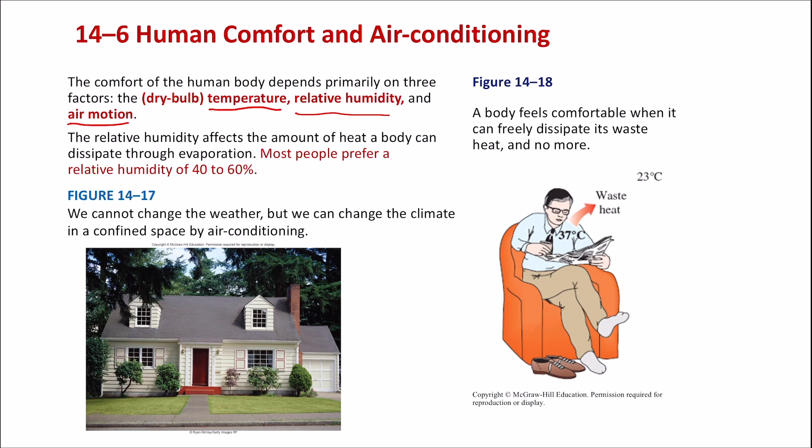So let's take a look at the major air conditioning processes. There's just simple heating, simple cooling, which is pretty much literal. You can understand. You just add heat or just cool it down. Or you can just add moisture, humidifying, or remove moisture, dehumidifying. So there are four basic processes, and of course you can imagine you can combine them together.

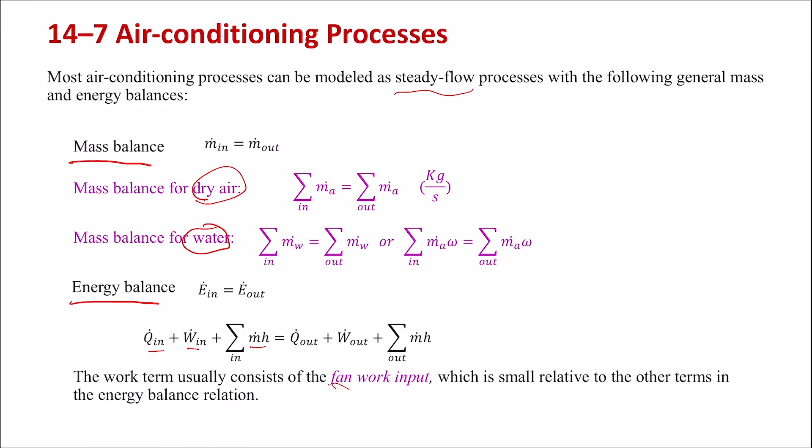So with this, we can start to analyze some typical problems. And today we're going to look at about 6 examples. So let's go through them one by one. The first one is just simple heating or cooling. Notice here omega is constant during simple heating and cooling, and on the psychrometric chart it is just a flat line. So please keep that in mind. Make sure you know how to draw these process lines as well.

So in simple cooling, the moisture content doesn't change, humidity ratio doesn't change, and you can write out the energy balance. There's no work, only heat transfer, and that equals the enthalpy change across this, whether it's losing heat or gaining heat.

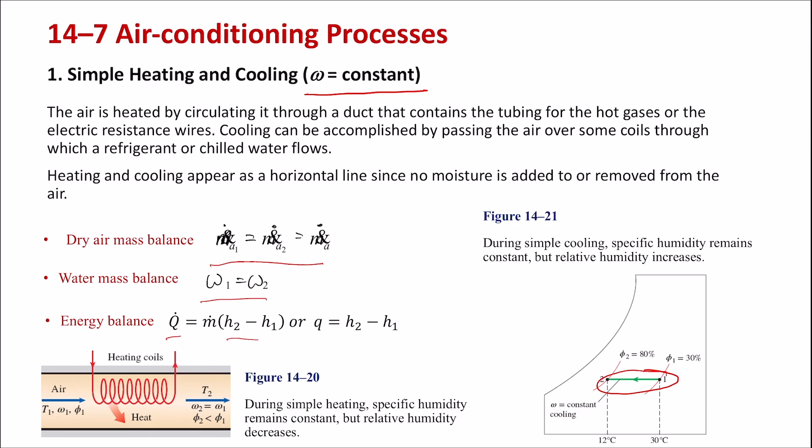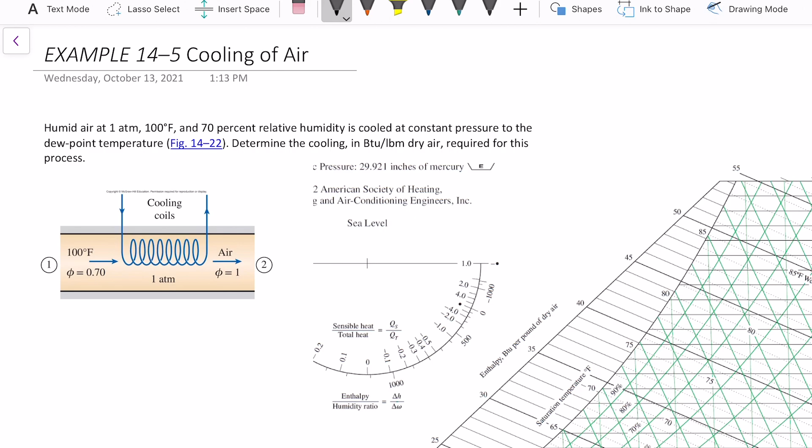So let's take a look at this example. The problem gives you the inlet air, and it says it's cooled at constant pressure to dew point temperature, and determine how much heat it lost through this process. Now if you want to find Q, it will equal H2 minus H1 in this case. We're given the inlet state, so we can determine H1 from the chart or from calculation. Then we just need to find H2. We're told that the final temperature is at dew point temperature.

So how are we going to find the dew point temperature? Remember, this process is just a simple cooling process, so omega stayed the same. So on your chart, you will draw a flat line to find the dew point temperature. And remember, the dew point temperature is that if the temperature is lower than that, water is going to condense. So that's how you get phi equals 1, so the relative humidity is 1. The problem didn't explicitly say the exit humidity is 100%, but from the statement in the problem, you can derive that.

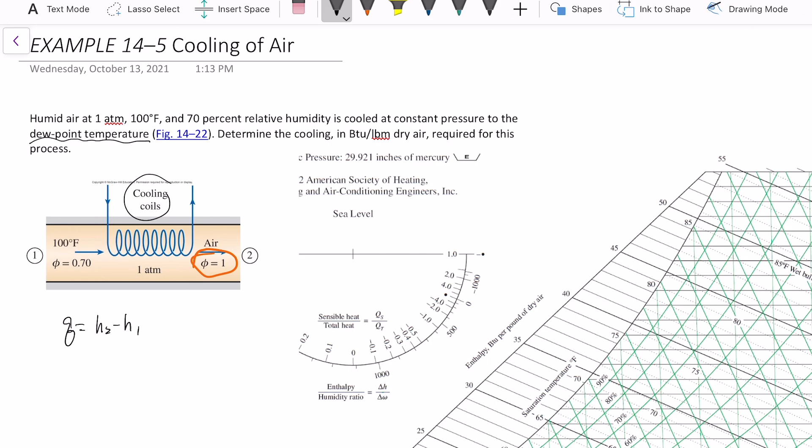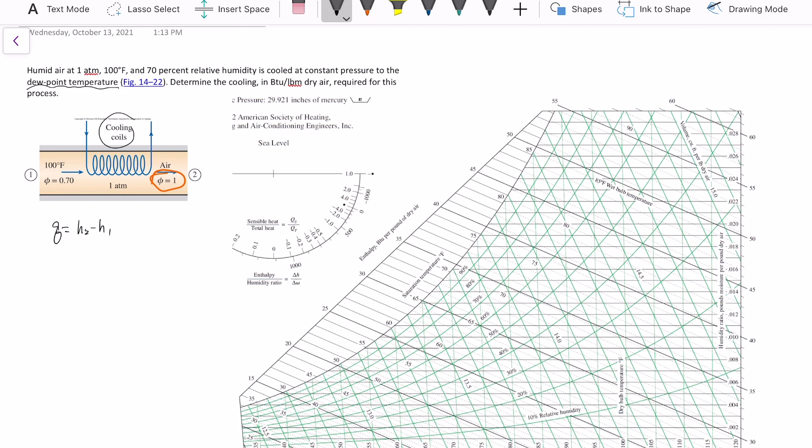So let's take a look at the chart. This is in English units, so make sure you find the proper table in the appendix. State 1 is 100 Fahrenheit and 70% relative humidity. So you're going to draw this line straight up and see where they meet. They almost meet at the top. And then from there you can read H1.

So the H line is here, in BTU per pound. There's 50, 55, and 60 here. So 55, 56, 57. So my state 1, H is between 56 and 57. It's close to 57. So from the chart, we read H1 equals 56.7 BTU per pound mass.

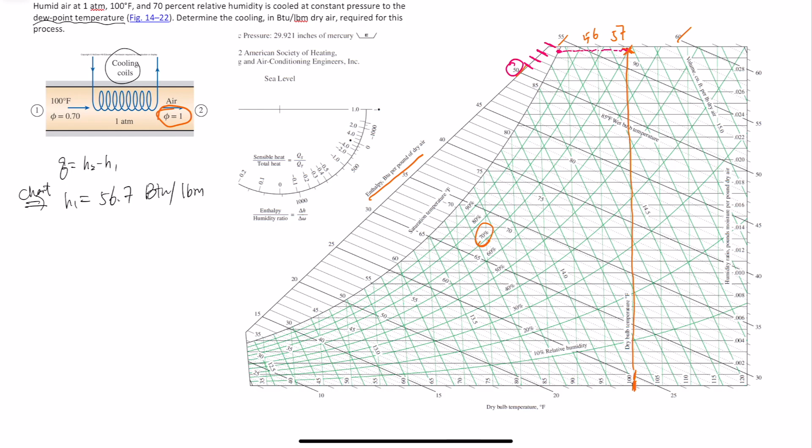And now we need to find H2. Remember we said omega doesn't change, so it will be a flat line. And it reaches the saturation point, or the dew point temperature. We're interested in H, so we can read H directly from there. So again, this is 50, 51, 52, 53, 54. So it's between 53 and 54. Let's just call it H2 equals 53.8.

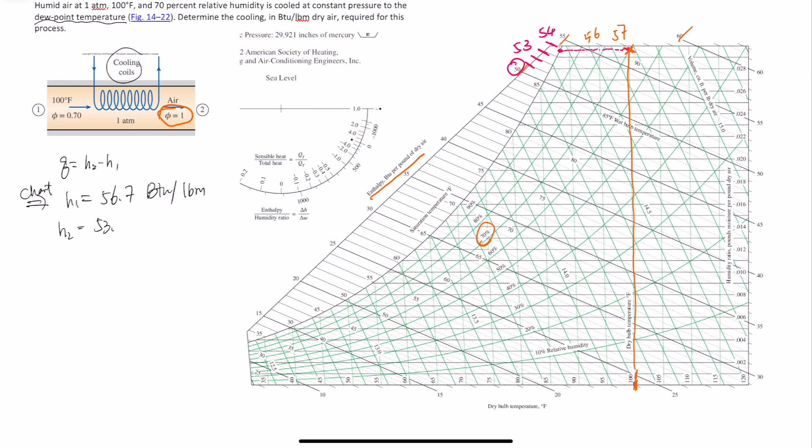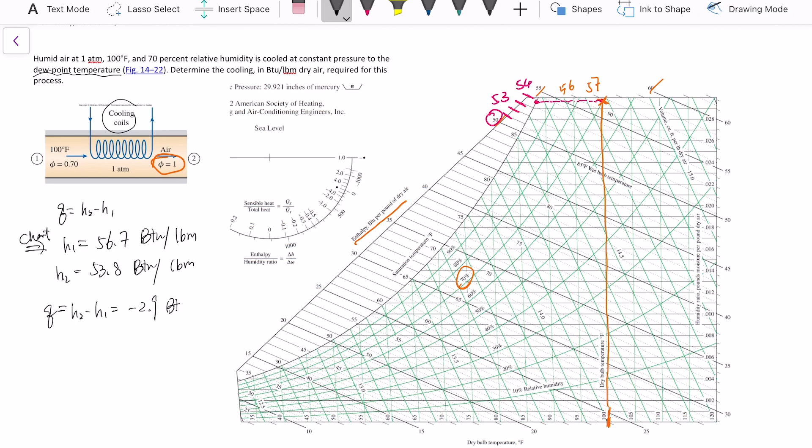And then you can calculate Q. In this case, H2 minus H1 is a negative number. So negative 2.9 BTU per pound mass of dry air. We have to be a little explicit in this case. So here is dry air and dry air. And so this will be Q out.

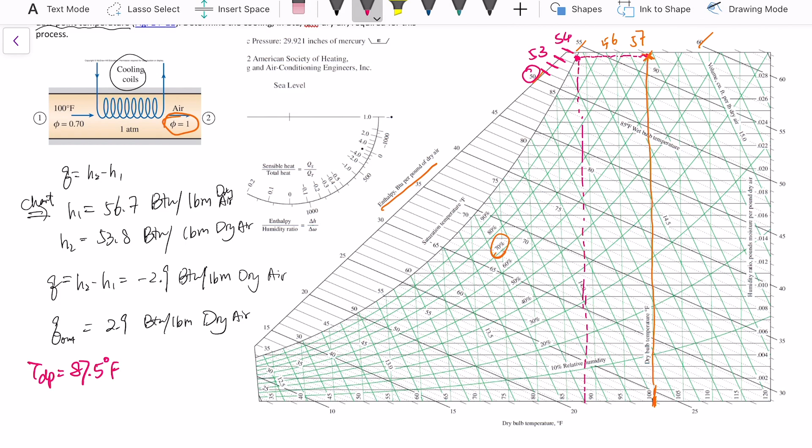So if the question asks you what is the dew point, you got to make sure you know how to find it out. Again, I like to just go from the 100% point directly, go down to read the dry temperature. So let's see that. Looks like it's between 85 and 90. It's closer to 90. Let's call it dew point is about 87. Let's say 87.5 Fahrenheit. So how much did it get cooled? It got cooled from 100 to 87, so about 13 Fahrenheit.

Okay, now let's look at the second scenario where you have heating with humidification. Usually this is done in two steps. You have air first passing through a simple heating coil, and after that the temperature reaches your desired temperature, and then it goes through a humidifier, so you add water or moisture into the air. It's shown on the left bottom corner. As you can see, you have two steps. From 1 to 2, omega doesn't change, it's just simple heating. And then from 2 to 3, you start to add water to it.

So again, from this, you can write out the mass balance. The dry air never changed from 1 to 2 to 3. The dry air remained the same. But for water, from 1 to 2, omega doesn't change. But from 2 to 3, omega actually does change where you add water. So m dot water equals the difference between omega 3 and omega 2. For the energy balance at the heating, you have Q in equals m dot times H2 minus H1, just like what we did earlier.

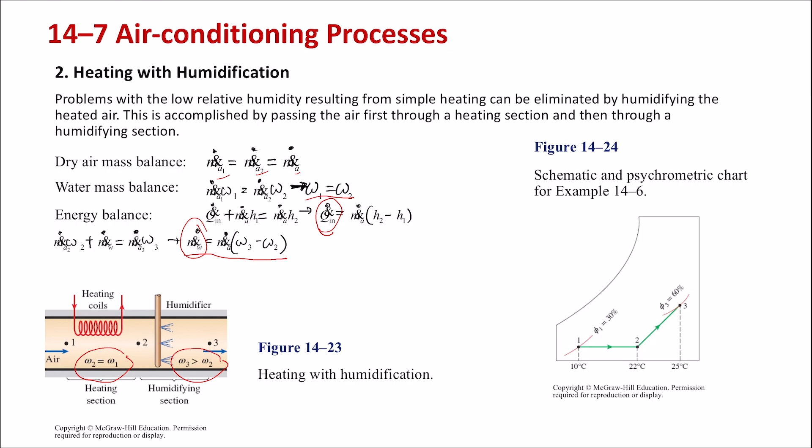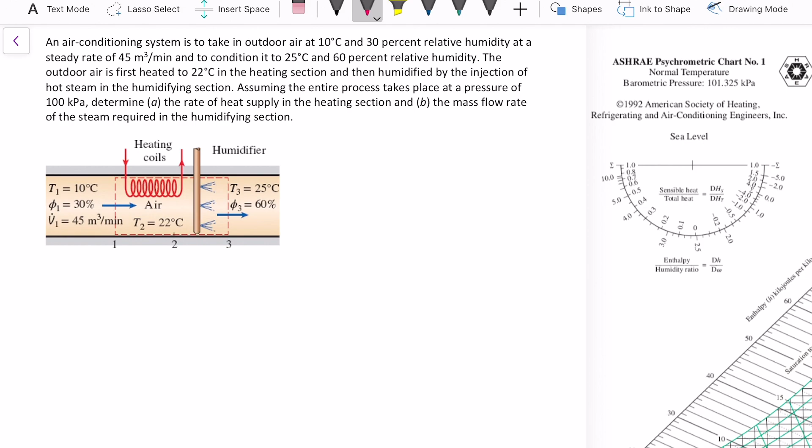So let's take a look at how we do the analysis with some numbers. You're given the inlet property of the air, and you're given the volumetric flow rate. Then you condition it to 25 Celsius and 60% humidity, which is the exit, so T3 and phi 3 are given. And you're told that the air is first heated to 22, so the first step is 22 Celsius. The question asks you for the heat supply in the heating process from 1 to 2 and the mass flow rate of the steam adding, so from 2 to 3.

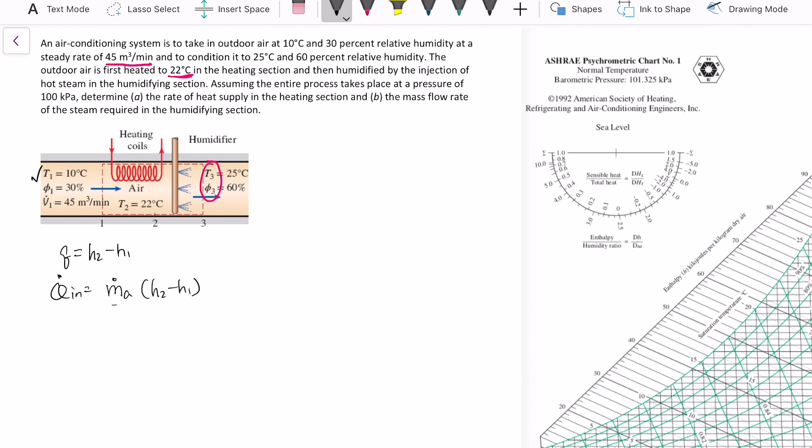So to find the heating, Q equals H2 minus H1, right? And then if you want to find the total Q in, it would be m dot A times H2 minus H1. So we need to find out the mass flow rate of the dry air, and of course find H2 and H1. H1 is pretty much given, and H2 you can find out because from H1 to H2 omega doesn't change. So how do we find out the mass flow rate of the dry air? We are given the volumetric flow rate of the dry air at the inlet, and volumetric flow rate is defined as mass flow rate times specific volume. So from there, we can find out the mass flow rate.

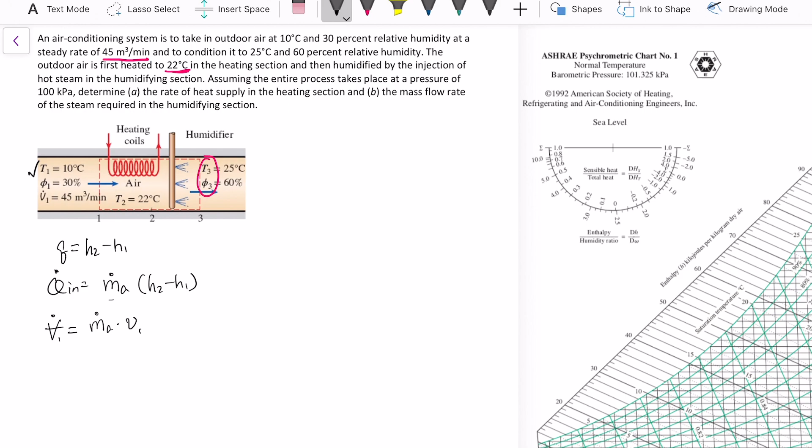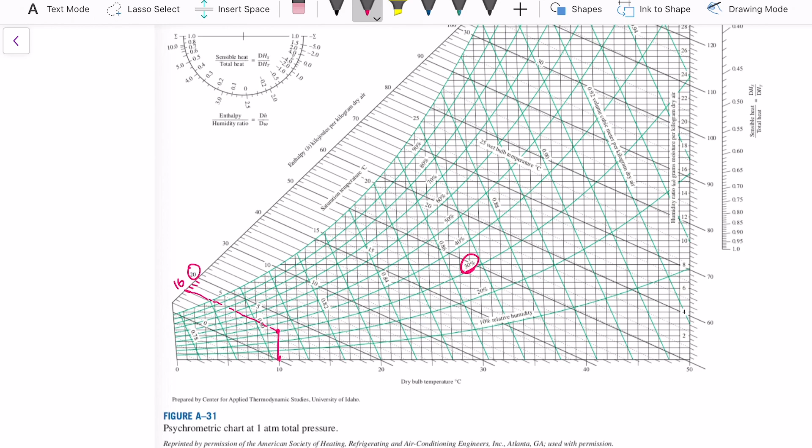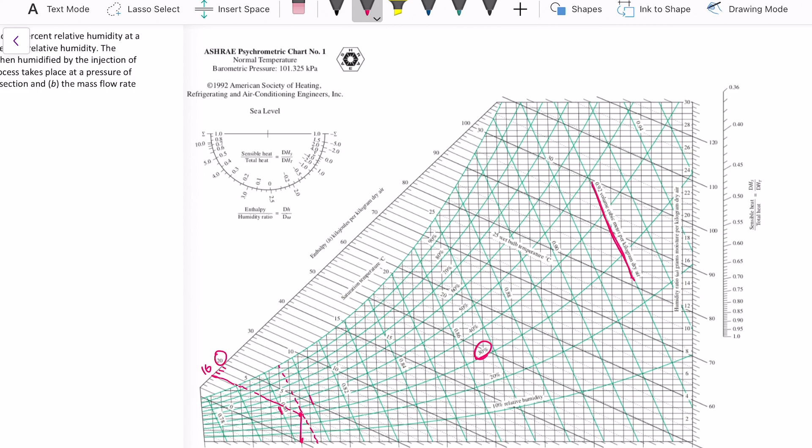So let's go to the chart and collect some numbers. For state 1, we have 10 degrees Celsius and 30% relative humidity. So 10 degrees and 30. It's here, and you can read the H from there. Here's 20, and each grid is 1, so 19, 18, 17, 16. So it is 16. We also need to find V1. Remember, we need V1 to calculate the mass flow rate. V1 is parallel to these green lines. It's about that. This one is 0.8, this one is 0.81, so that point looks like right in the middle. So we call it 0.805.

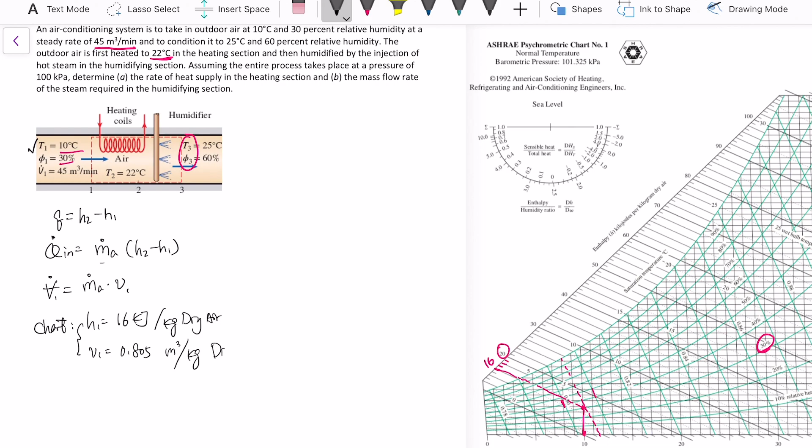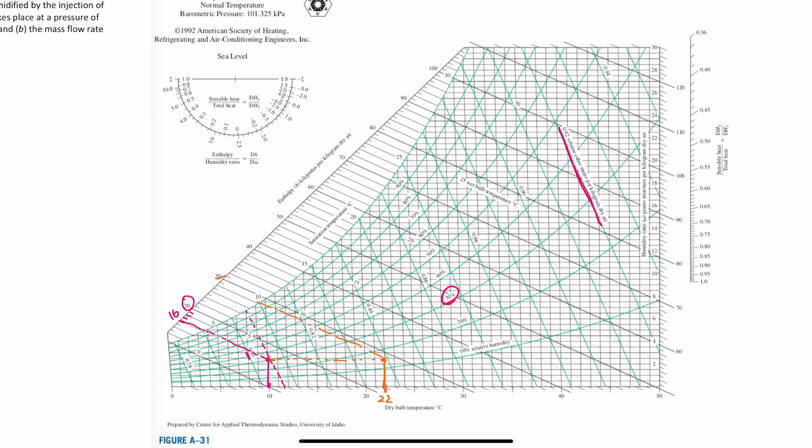So let's write those things down. From the chart, you find H1 equals 16 kilojoule per kilogram of dry air. V1 equals 0.805 meter cube per kilogram dry air. Then we can look up point 2. We said point 2 is 22 Celsius. Omega equals omega 1, which means it is a flat line. So you can draw a flat line from point 1 and cross it with 22. So this is 22. And we need H, so go to read H. It looks like 28. So 30, 29, so about 28. So we find H2 is 28 kilojoule per kilogram dry air.

Now we can calculate m dot A, which is the volumetric flow rate over specific volume V1. So 45 meter cube per minute divided by 0.805 meter cube per kilogram. So you get 55.9 kilogram dry air per minute. Then we can calculate Q in equals m dot times H2 minus H1. Plug in the numbers, I'm going to skip a little bit, and it equals 670.8 kilojoule per minute.

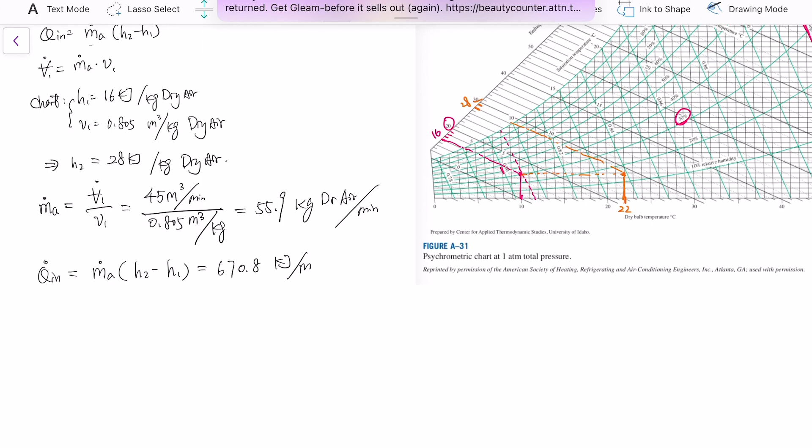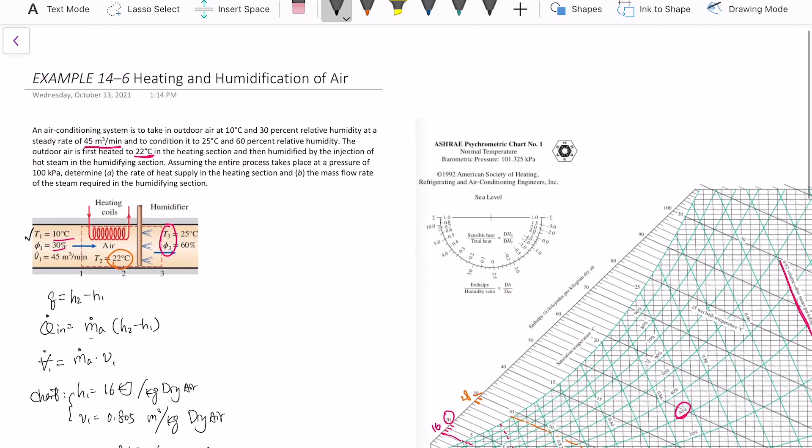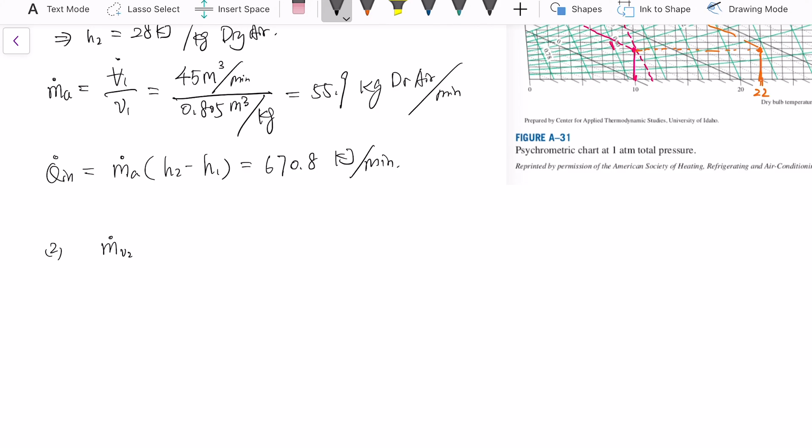You can convert the unit into seconds, but it doesn't say you have to, so you don't have to. And the next part asks you how much water you need to add in during the humidification section. So from the mass balance, we know that m dot V2, the vapor content from 2 to 3, that's the adding water part. So m dot V2 plus the mass of the steam adding in equals the final water content.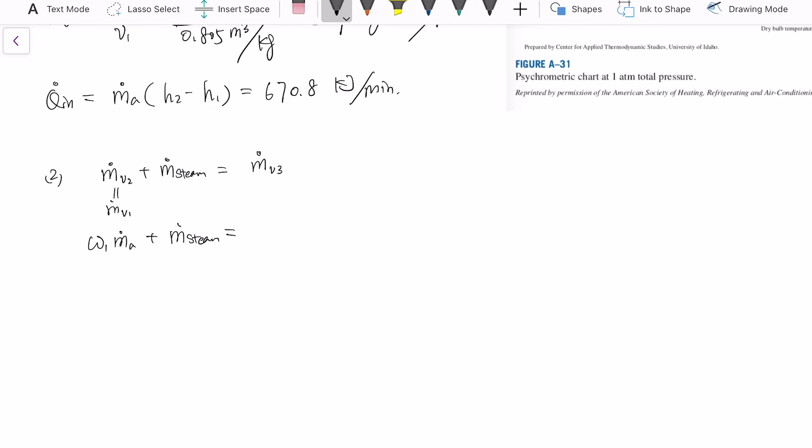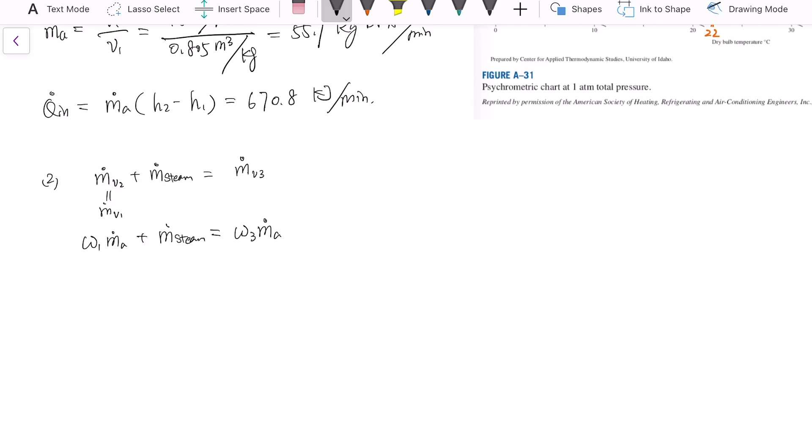And we know that the moisture in state 2 equals state 1. So this equals m dot V1, which you can express as omega 1 times m dot A, plus steam equals omega 3 m dot A. So that means we already found m dot A. We need to find omega 1 and omega 3. Earlier we didn't read omega 1, so let's read that first.

So from here you can draw this line all the way to the right. So let's see, this is 2 and this is 3. This is close to 2.5, so let's just call it 2.5. Earlier we can write one more here. Omega 1 equals, remember this is in gram, but our ratio is actually kilograms, so it's 0.0025 kilogram per kilogram dry air.

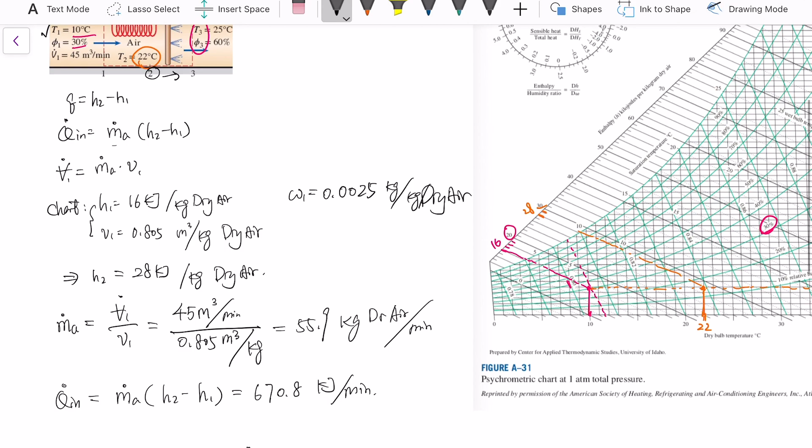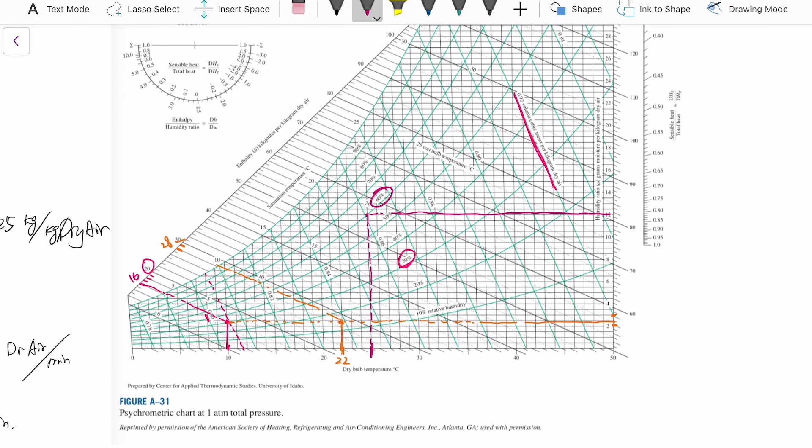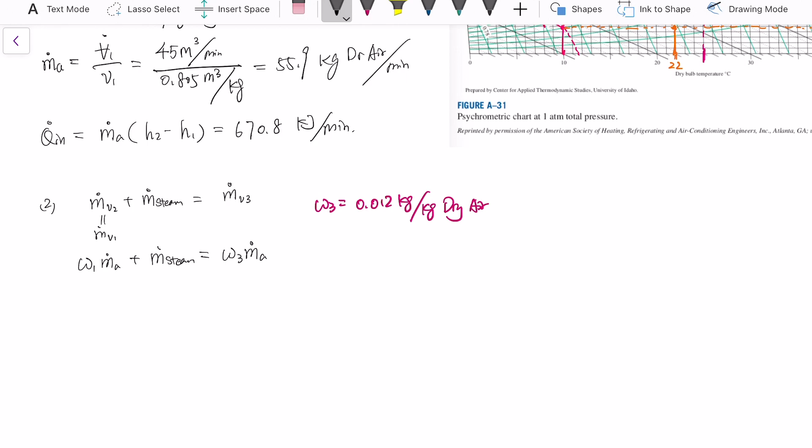And then let's see omega 3. You're given the state 3, temperature is 25 and humidity is 60%. So read the chart one more time. 25, humidity is 60%. And that looks like 12, so 0.012. All right, now we can calculate the steam. M dot steam equals m dot A times omega 3 minus omega 1. We know all the numbers. I'm going to skip the plugging in again. It's 0.53 kilogram per minute.

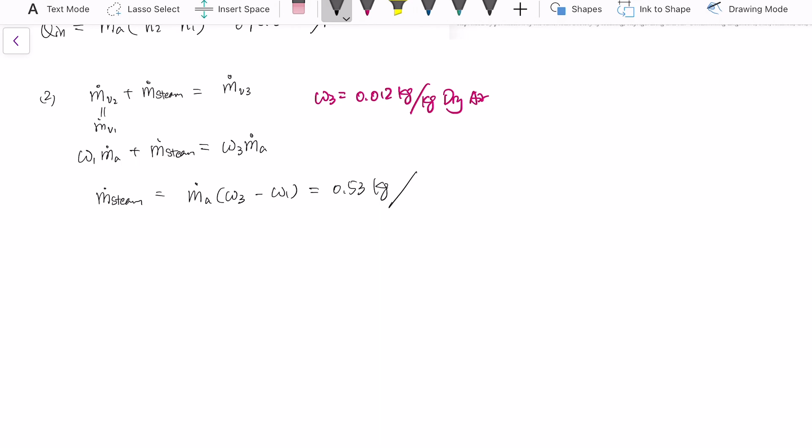Similarly, we can do the cooling with dehumidification. The concept is pretty similar to the previous one, so we're going to go a little bit quicker on this one. So you can see from the psychrometric chart on the right, at the beginning the air starts to cool off. And as it cools off, at one point it becomes saturated. And when it becomes saturated, water is going to come out, and then you start to remove the water out of the air conditioning system, and then the process will remain on this 100% relative humidity line.

So in this process, as illustrated on the chart on the bottom, you have air coming in, and then there will be an outlet for the condensation water to leave the system. Again, dry air mass doesn't change, and water mass in at inlet 1 equals water going out from 2 and from the condensation. So you can calculate the condensation amount of water. Energy balance, we actually have 3 inlet and outlet, and there's also Q leaving this system as well. So energy coming in is m dot 1 times h1, and equals out: we have Q plus all the 2 outlet in this case. So we can calculate how much heat transfer happens during this process.

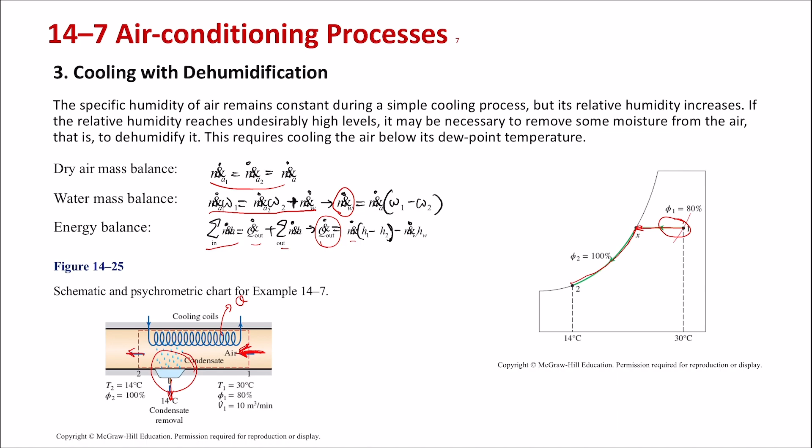So this problem is pretty similar to the previous heating with humidification, so we're going to go really quickly. You're welcome to pause this video and try to solve this problem yourself. The concept is pretty much similar. You're given the condition at state 1, and you're also given the volumetric flow rate at state 1, so you will need to look up the specific volume to calculate mass flow rate. And after it leaves, it becomes saturated. That means during this process, there will be water condensing, and there is an outlet for the condensed water to leave the system.

So the question asks you, what is the heat transfer going out, and how much water got removed? To calculate Q out, you will still do m dot A times h1 minus h2. That's how much the air cooled, and the energy associated with it drops as well. Also in this case, we need to have the water energy removed from the system as well. So you do need to look up to find out the m dot water first before you calculate Q out. And the m dot water from the earlier page, we already know that's just water condensation from it. So m dot water equals m dot A times omega 1, which has a bit more water, minus omega 2, which has less water.

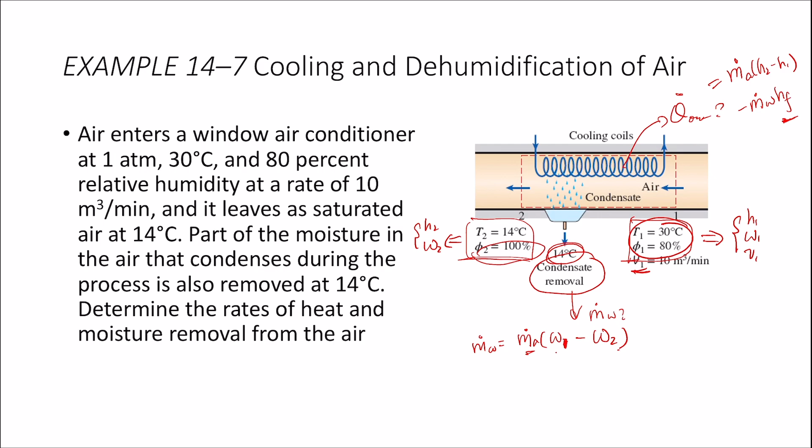You just need to find out HF in that sense. And so you go to the water table to find out water leaving. So you're told water leaving at 14 degrees Celsius. So you can find HF at 14 degrees Celsius to approximate the enthalpy of the water leaving the system.

So first state, 30 degrees Celsius and 80% humidity. It's about this point. And then you go ahead and read the H on the top and omega on the right. So H is about, so this is 80, 81, 1, 2, 3, 4, 5. So between 85 and 86, we can call it 85.5 if you want. And omega on the right hand side, so this is 20, this is 21, so this is over

21.5, so we can say it's 21.6, and then we can read the volume, which is parallel to that line, so 0.88, so this line would be 0.89. My specific volume would be between those two numbers. We can call it 0.888 or 89. So let's write them out. Omega 1 equals 0.0216. And V1 equals 0.889. H1 is 85.5.

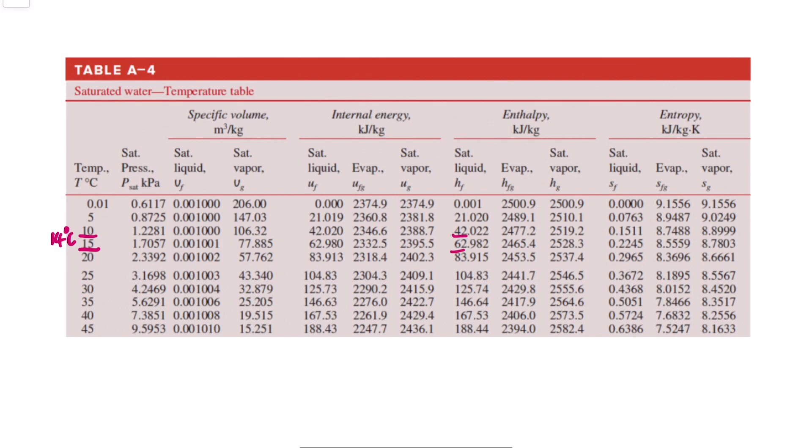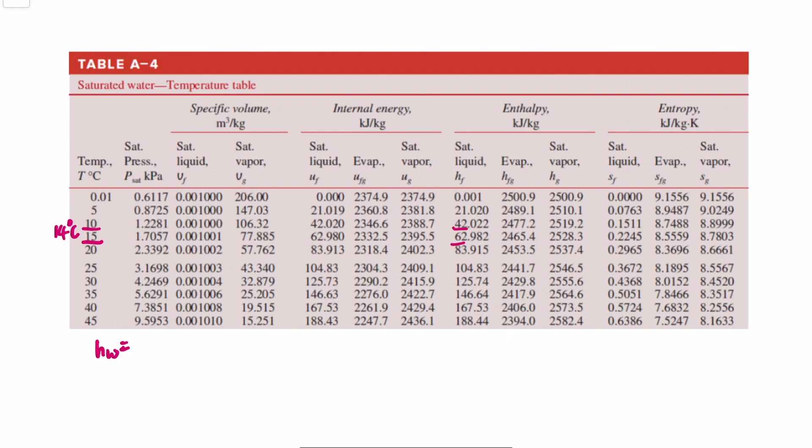So we need to look up in the water table. So the water table here, you have 15 and 10. Our temperature is 14 degrees Celsius. So my H is between 42 and 62. You got to do a little interpolation and you will find out H of water equals 58.8. Then you can plug back into this Q equation and calculate the number. So I would encourage you to go ahead and try it out yourself.

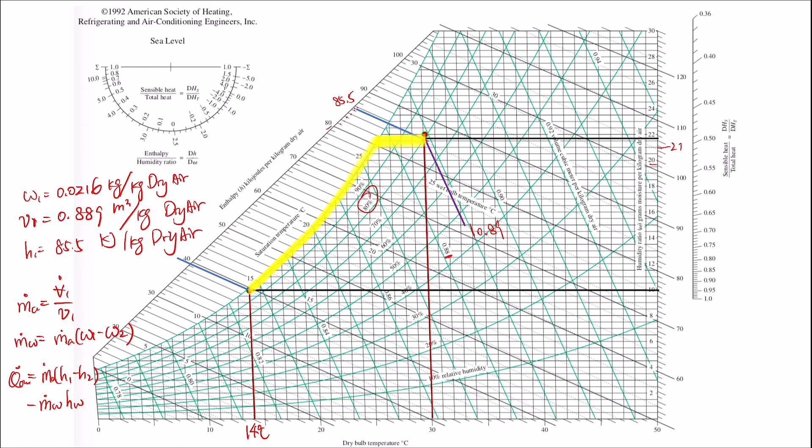One thing I do want to point out is this process would go through a cooling. So the humidity, the specific humidity doesn't change at the beginning. So it would just be a flat line to the left. It starts to cool. But once it hits the saturation line, the water is going to leave from the air and it starts to condensate. And then the air will remain as a saturated air. So it will follow the saturation line like that. So that's the process line.

The next example is called evaporative cooling. Basically what happens is you probably had this experience where you feel really hot and you put some wet towel on your head. So the wet towel is going to evaporate water into the air, and then you can feel immediately cooling on your head. Or another scenario is if you ever wear clothes and jump into the water, or you just happen to get caught in the rain, you will feel very cold because the water of the wet clothes will start to draw heat from your body. And especially when there's air passing through you, that's when the air is going to draw more water to evaporate, and it's going to draw more heat from you. So that's pretty much the evaporative cooling.

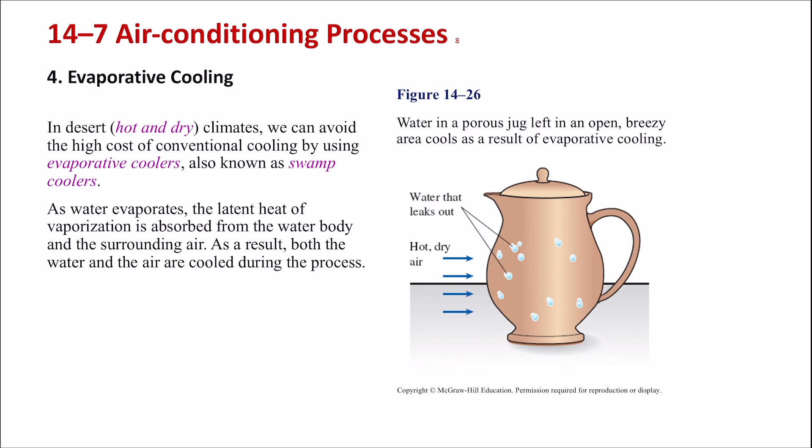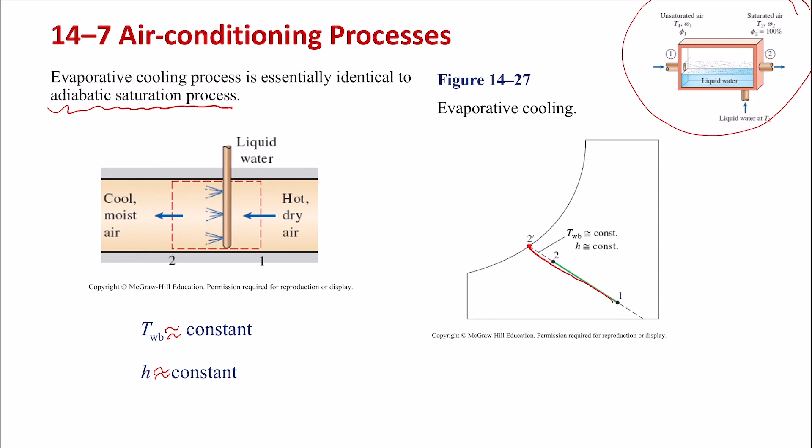So if you recall on the psychrometric chart, these two lines are parallel to each other, more or less. And of course, the lowest the temperature it can be is when it cooled down to saturation. So on the 2', that would be the lowest the temperature this process can reach. So you do have a limit of this process. So for example, this desert dweller situation where they put soaked cloths on top of their head to help them to cool down.

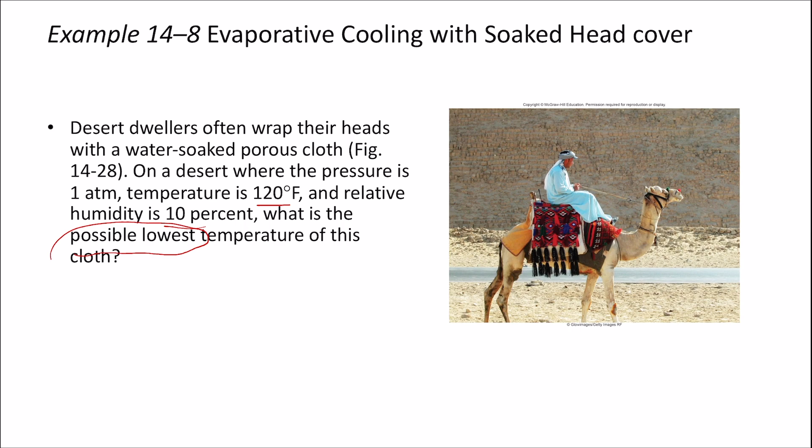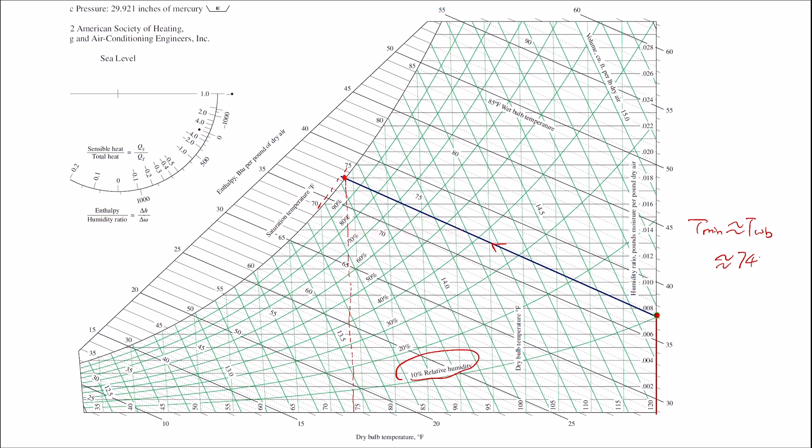The next topic is the adiabatic mixing of airstream situation. So this is when you have, say, the building AC system, and instead of just letting the air circulate, you want to bring in some fresh air so you can keep the air circulating, which is probably better for your health.

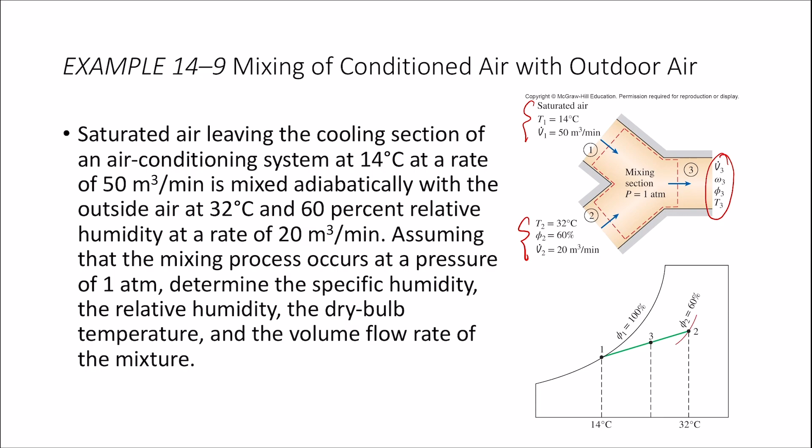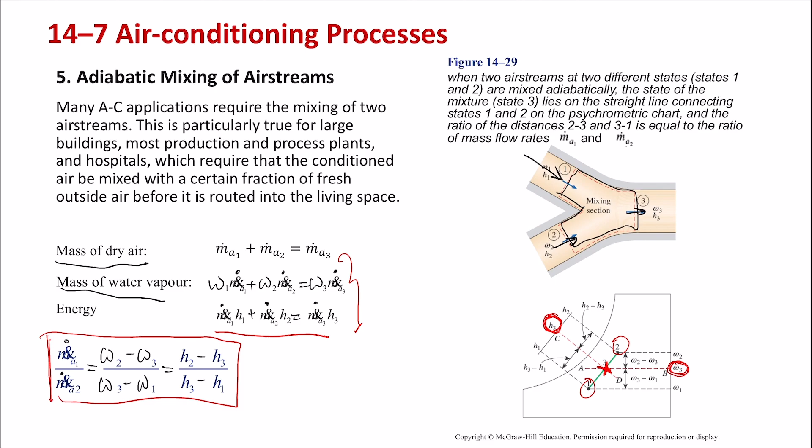So first of all, locate state 1 and state 2. State 1, 14 degrees Celsius and 100% humidity. State 2, 32 degrees and 60% humidity. From there, we can go ahead and read H1, V1, omega 1, H2, V2, omega 2. I'm not going to read in details; hopefully you can find out by yourself by now. So from the chart, we locate these numbers. We were given the volumetric flow rate at both inlets. We can then find out m dot A1 and m dot A2.

You can quickly do the process. We already did that before. Just use volumetric flow rate divided by specific volume. And then we can calculate m dot A3, which equals the inlets added together, which is 83 kilograms per minute.

And from the previous ratio formula, we know m dot A1 over m dot A2 equals omega 2 minus omega 3 divided by omega 3 minus omega 1. So you can plug in numbers. We found A1 and A2. Omega 1 and omega 2 we already know, so we can calculate omega 3, which is 0.0122 kilogram per kilogram dry air. And similarly, this ratio also equals H2 minus H3 over H3 minus H1. So you find out H3 is 50.8 kilojoules per kilogram dry air.

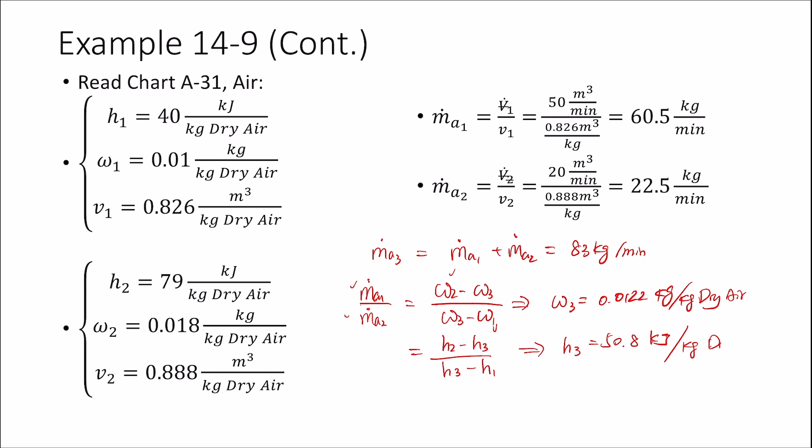Then you can go back to the chart and read off. So that point should be on the connection line between A1 and 2. So omega 3, 0.0122, so it's 12.2. 12 is here. This is 12.5, so it's in the middle. So let's try to draw a flat line.

And then h is 50.8, which is close to 51. This is 51, so hopefully these two lines will cross on the connection between point 1 and 2. So now we locate the state 3. From there we can read the other properties, and we can see that the relative humidity is close to 90%. We can say this is maybe 89 or 88.

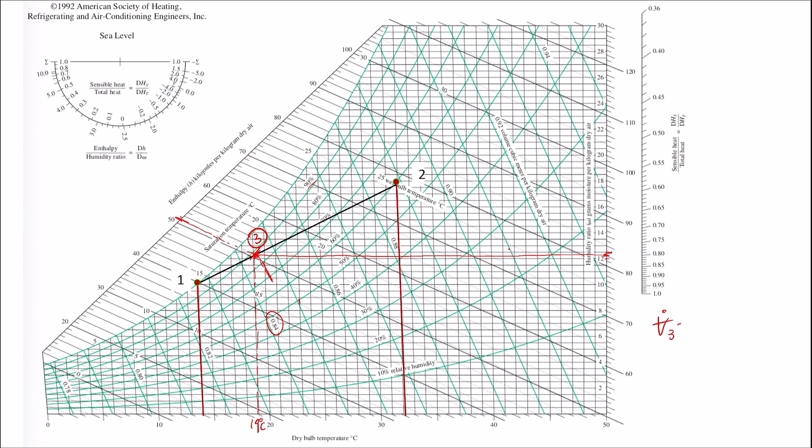And it asks for the dry bulb temperature, so you just draw a straight line going down. It's pretty close to 19 degrees Celsius, so we can say it's 19. And then they ask you to calculate the volumetric flow rate after the two streams are mixed. So that means we need to find the specific volume at state 3. The specific volume is between 0.84 and 0.85, so it's almost in the middle. We can say it's 0.845. Then you can calculate V3 equals m dot A3 times v3, and you get approximately 70.1 meter cube per minute.

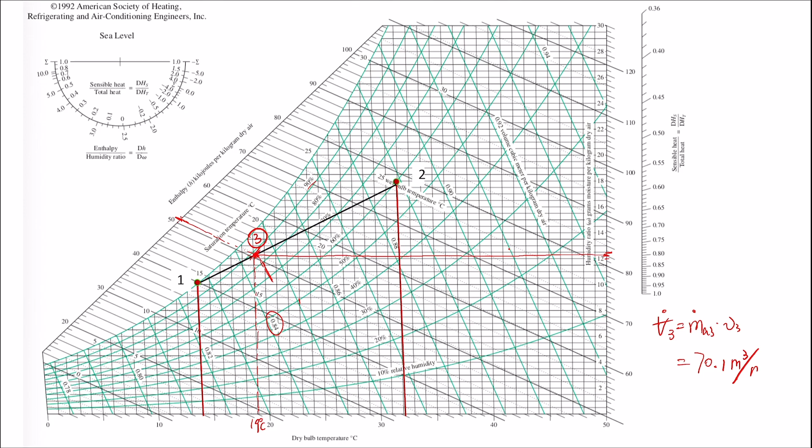So the last application of this section is the wet cooling towers. You probably remember that when we discussed the Rankine cycle, we talked about the power plant, and there you need to have the cooling system where the steam will condense. And there you need a big reservoir to cool down the hot water, especially if the capacity of the power plant is huge, and so you will need a big capacity of cooling reservoir. So sometimes it's just not feasible. You just dump the heat into, say, a lake next to you.

Sometimes you don't even have a lake next to you. Sometimes the lake is too sensitive to the heat rejection. There are a lot of water creatures there. You don't really want to destroy the environment there, so that's when a cooling tower comes in handy. You probably have seen this type of cooling tower. There's an illustration on the right to show.

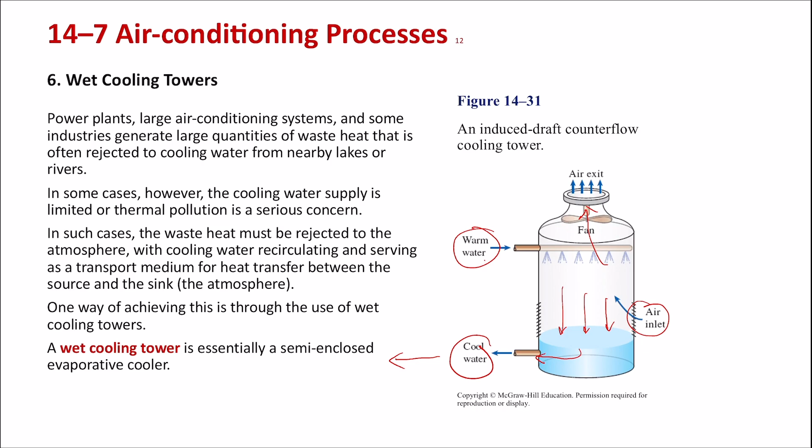This is a really tall stack, and there's some warm water coming in, and it sprays through, and there will be heat exchange between the warm water and the air. And then some water will cool off during this heat exchange, and the water will start to condense into liquid form. And then you take out the liquid, and it continues to combine with more water to keep cooling whatever your Rankine cycle or some other cycles that you want to cool off. And then the hot air will rise up and will leave this stack. So you probably have seen those types of stacks somewhere.

It looks more like this, and a lot of the time you see a lot of steam coming out, and that's when it's running. So those steams are just some hot, humid air. And this just shows you, instead of using a cooling tower, you can also have a spray pond. If the location allows, you can just let the warm water spray directly into the open atmosphere, and as it condenses, it just falls into the pond below. And then lastly, if you have the facility where you have your hot water and just dump it into this pond, it's just going to have heat exchange directly with the open atmosphere.

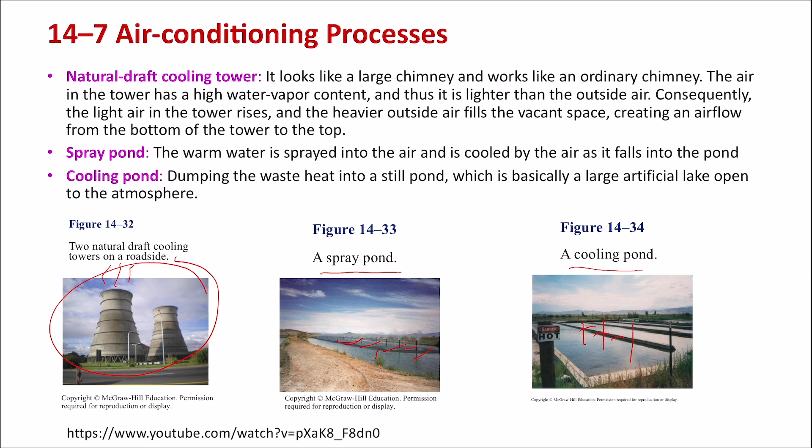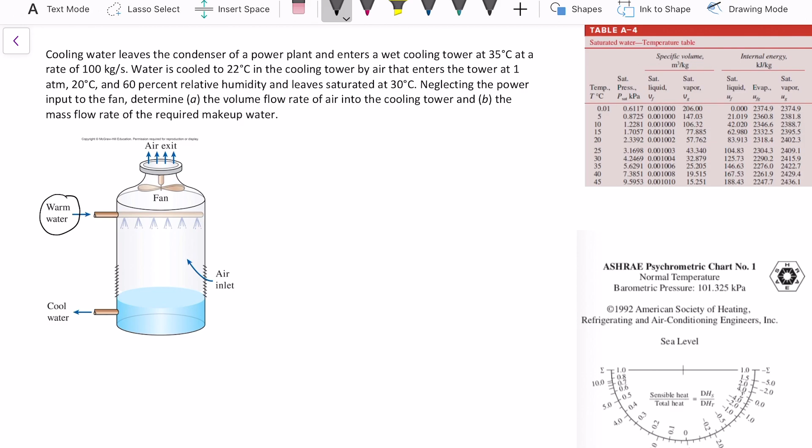So let's do a quick calculation about this cooling tower. First, the problem says the water leaves the condenser of the power plant. Remember, in the condenser, the steam needs to cool off, and then the cooling water becomes warm. So it enters this cooling tower because you want to keep that cooling water cool. So this side is also kind of running a cycle. It enters at 35 degrees C, and you're given the mass flow rate, and it is cooled. When it leaves, it becomes 22 degrees C.

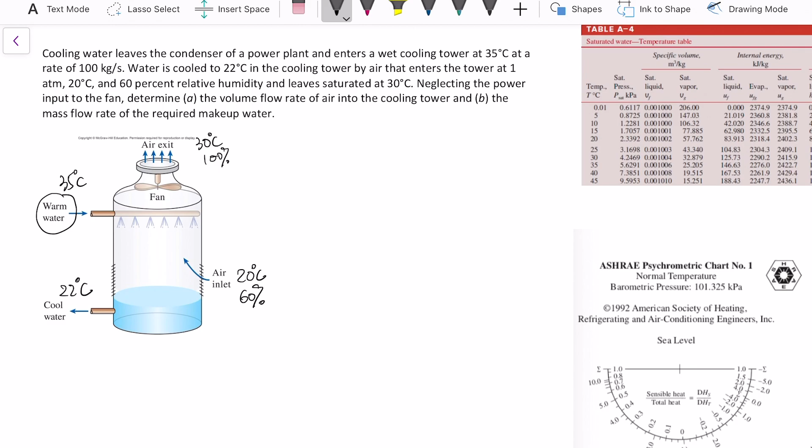And the air coming in is 20 degrees Celsius and 60% humidity. And when it leaves, the air leaves at 30 degrees Celsius and 100% humidity. And neglect the power input by the fan. Like we said before, fan work is relatively small compared to the heat. And find out the volumetric flow rate of air going into the cooling tower. So let's give it some numbers. Let's call this inlet 1 and outlet 2 for air. And for water, the inlet we call 3 and the outlet we call 4.

So we're asked to find the volumetric flow rate and the mass flow rate of the required make-up water. So what is make-up water? Here's the thing. You can imagine air starts unsaturated and leaves saturated, so it will take away some vapor. So this is my cooling water here at state 3. That means when it leaves as state 4, the water got less.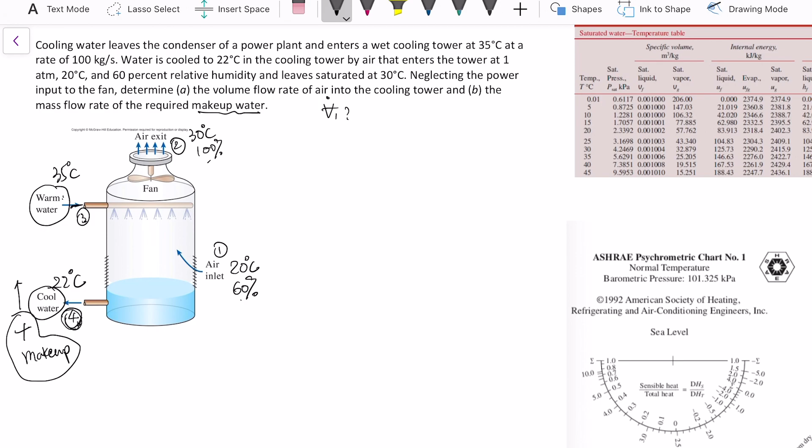But remember, this water is going to cool off your power cycle. So if you have less and less water, then eventually you can think of the extreme case where you have no water. So how can you cool the power plant cycle? You have to keep adding some makeup water to continue cooling the power plant. So the makeup is just to make up the mass difference between 3 and 4. So basically you need to find m dot 3 minus m dot 4. Also, let's not forget we're given the flow rate m dot 3 equals 100 kilograms per second. So that's going to be helpful.

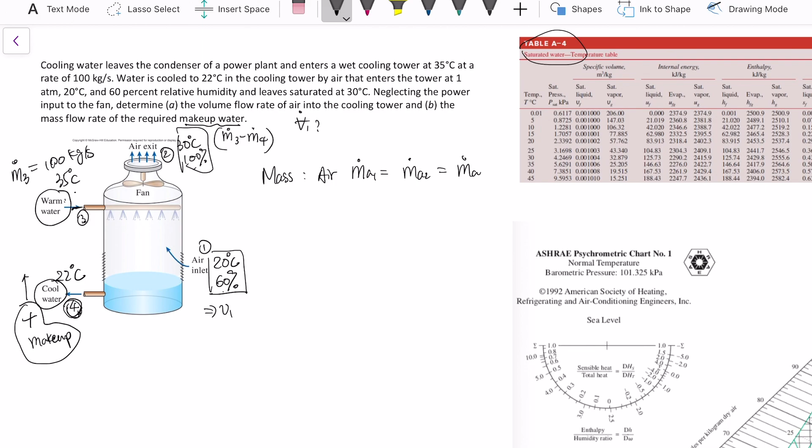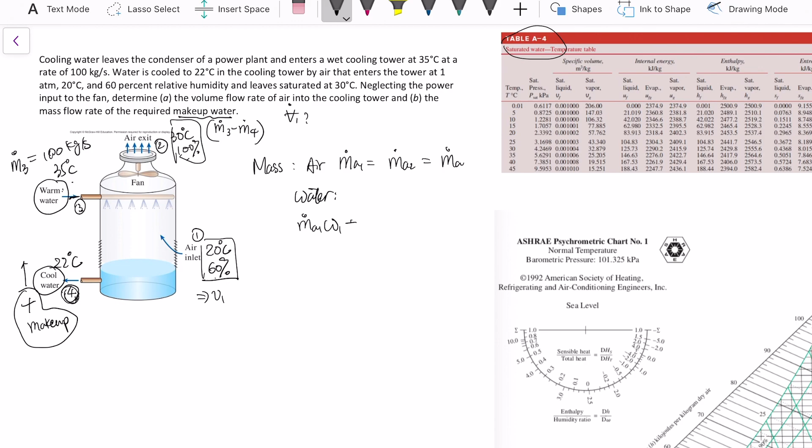We're probably going to use both equations, mass and energy, to link m dot A, m dot 3, and m dot 4 together. So let's take a look. For the mass equation, we have air: m dot A1 equals m dot A2 equals m dot A. We have water. Remember air also has water content. So that would be m dot A1 omega 1 plus m dot 3 equals m dot A2 omega 2 plus m dot 4. So for m dot A1 and m dot A2, we can just use m dot A.

Then we can write out the energy equation, which is inlet m dot A times H1 plus m dot 3 H3 equals m dot A H2 plus m dot 4 H4. So we have equation 1 and equation 2. Remember, m dot 3 is a known number, so I just don't know m dot 4 and m dot A. Two unknowns, two equations, I can solve it. It's a little tedious, so let's see how we can rearrange things to cancel out one unknown.

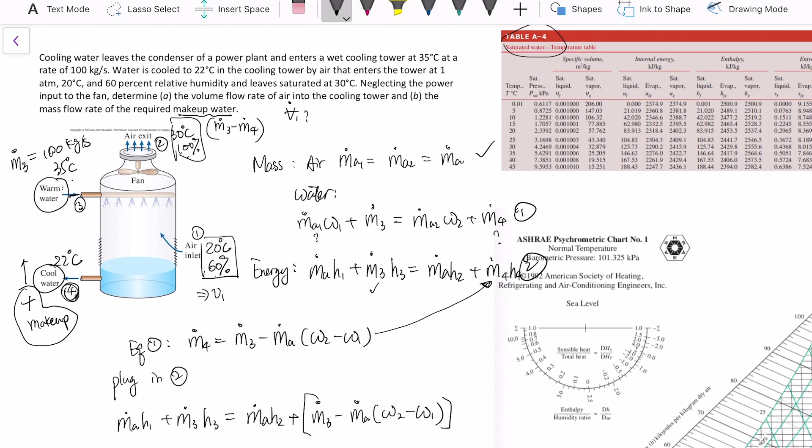From equation 1, maybe let's substitute m dot 4 first. So m dot 4 equals m dot 3 minus m dot A times (omega 2 minus omega 1). Then you can plug this m dot 4 into equation 2. We got m dot A H1 plus m dot 3 H3 equals m dot A H2 plus (m dot 3 minus m dot A times (omega 2 minus omega 1)) times H4. So it looks like this is going to be just one formula in terms of m dot A. You can rearrange everything; go ahead and do this by yourself. m dot A equals m dot 3 times (H3 minus H4) divided by (H2 minus H1 minus (omega 2 minus omega 1) times H3).

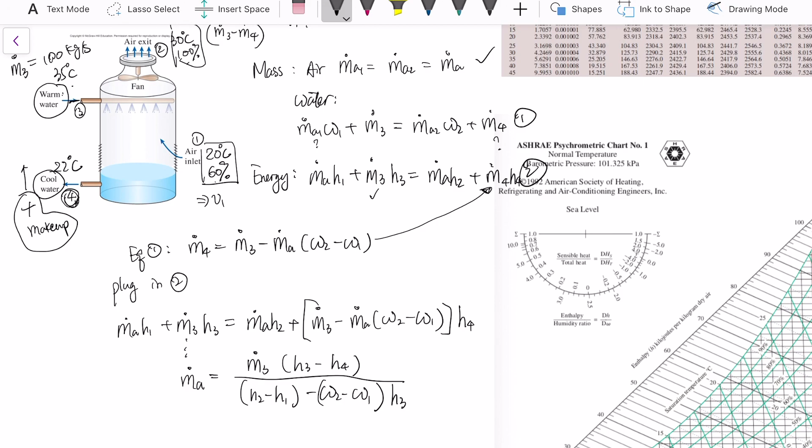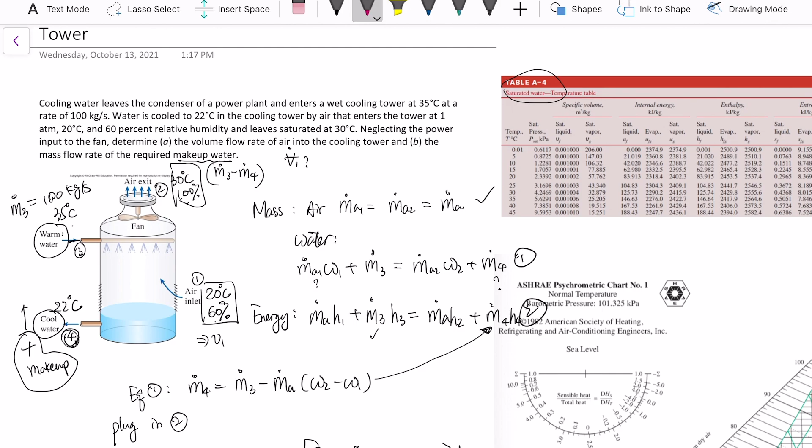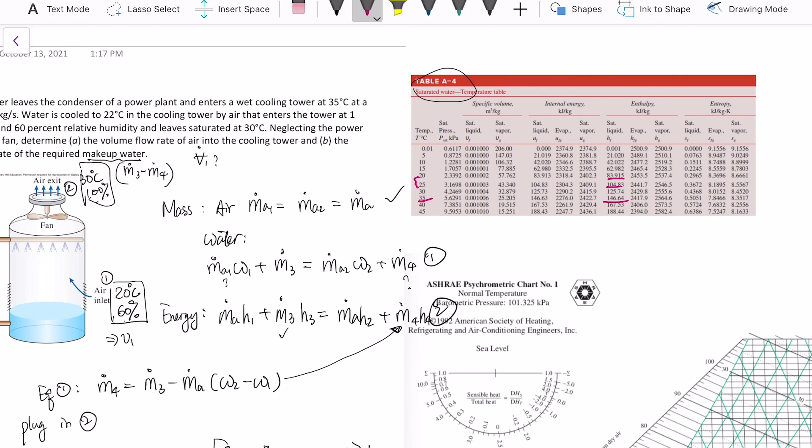So you can read omega 1, 2 and H1, 2 on the chart. H3 and H4 you can read from table A4. H3 is at 35 degrees, so you take hf at 35 degrees, and H4 is at 22 degrees, so you have to interpolate between two numbers. You got H3 equals 146.64 and H4 equals 92.28.

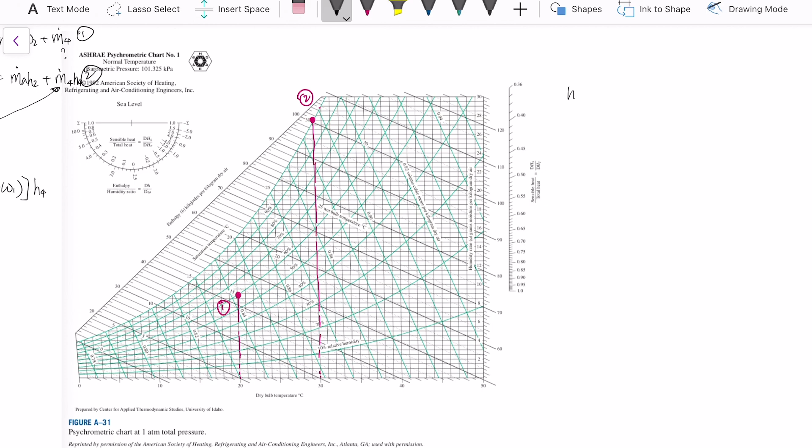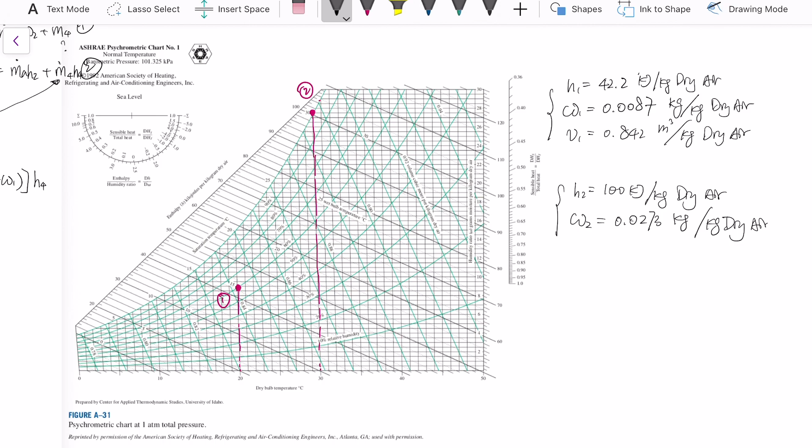From this psychrometric chart, hopefully you can read all the numbers by yourself now. H1 equals 42.2, omega 1 equals 0.0087, V1 equals 0.842, H2 equals 100 kilojoules per kilogram, and omega 2 equals 0.0273 kilograms per kilogram dry air. Then we can plug into this m dot A formula. You get 96.9 kilograms per second. You're asked to calculate the volumetric flow rate at the inlet of air, so it would be m dot A times V1. That gives you 81.6 cubic meters per second.

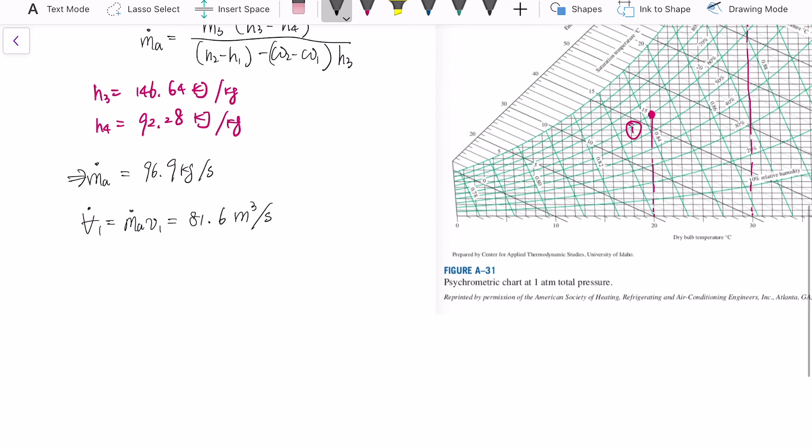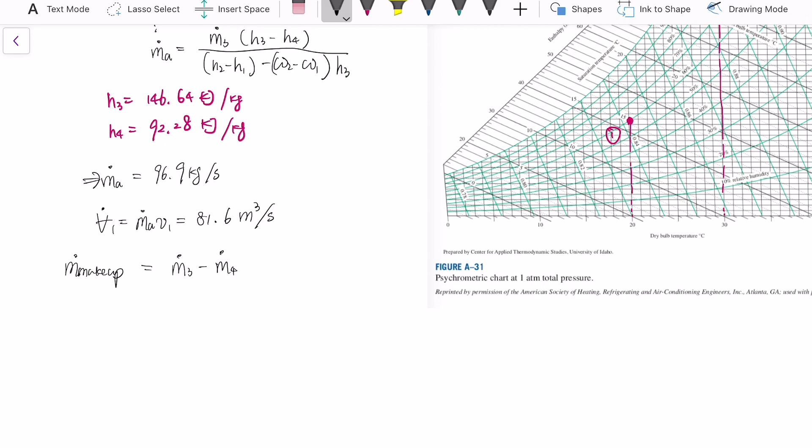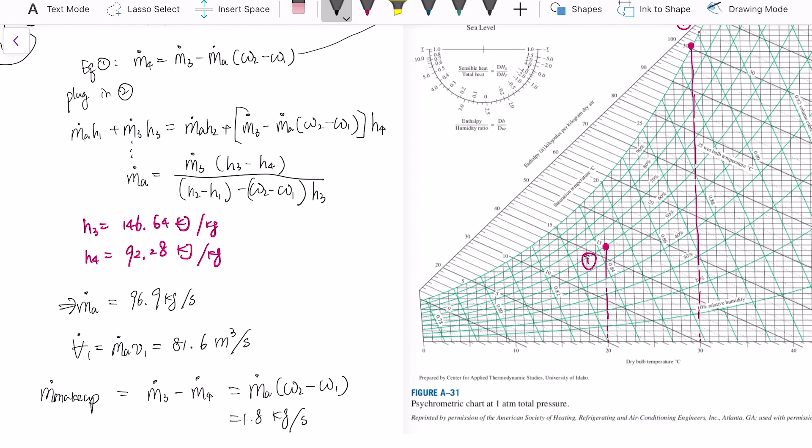To calculate the makeup water, that equals m dot 3 minus m dot 4, which you can get from equation 1: m dot A times (omega 2 minus omega 1), which is 1.8 kilograms per second. This way I don't need to calculate m dot 4 again. So that's pretty much it.

That concludes all the examples in this chapter. Notice here we pretty much heavily rely on reading the psychrometric chart, once we're sure that we're able to use 1 atmosphere pressure. So hopefully now you feel very comfortable reading the chart and setting up the equations, pretty much just mass equations and energy equations. Hopefully you got enough practice today, and that concludes chapter 14.